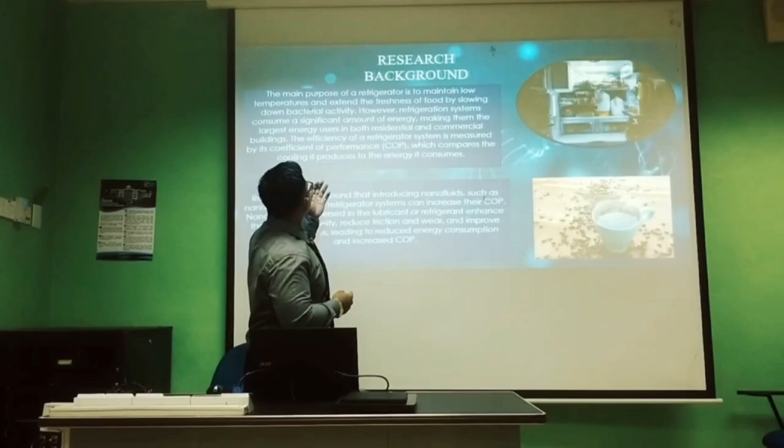For introduction, I will proceed to the research background. Okay. For the research background, you know, the refrigerator is the biggest space where we keep our food. The main purpose of a refrigerator is to maintain low temperature and extend the freshness of food by slowing down bacterial activity. However, the refrigerator system consumes a large amount of energy in residential and commercial buildings.

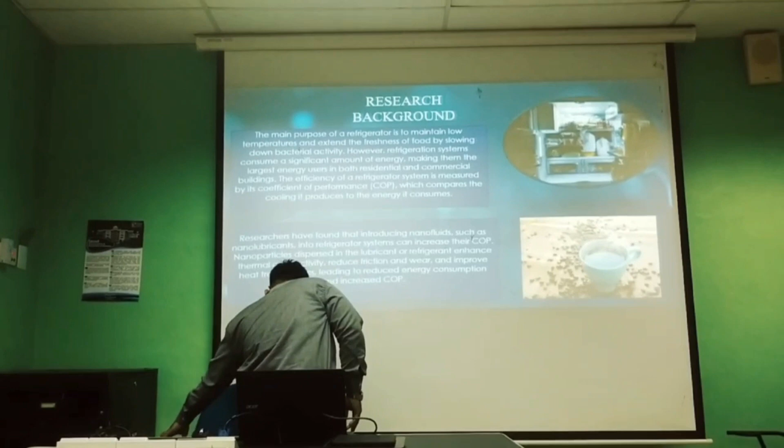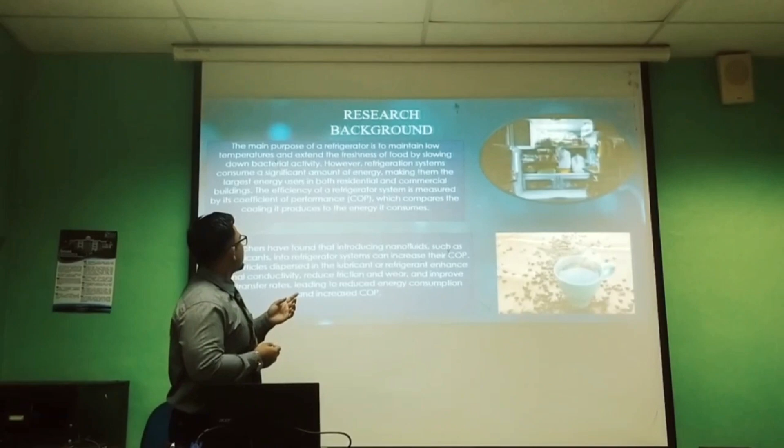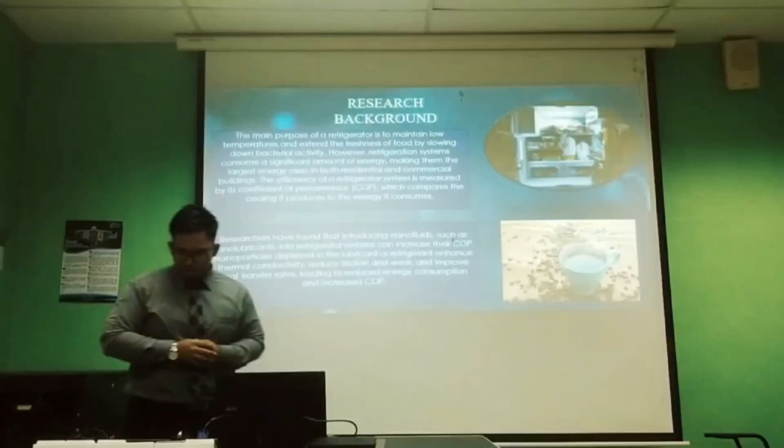To measure the refrigeration system, the efficiency of the system is measured by the coefficient of performance (COP), which compares the cooling it produces to the energy provided for the cooling effect. Okay. So in terms of increasing the coefficient of performance, some research has found that introducing nanofluid such as Nanolubricant will improve the cooling effect with a small amount of energy.

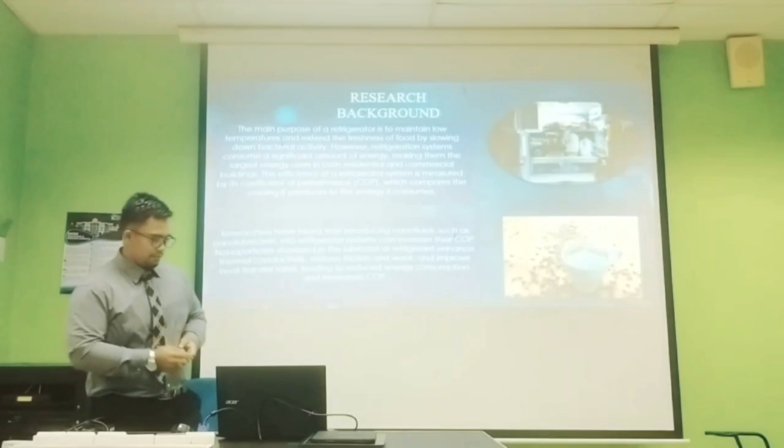One problem statement that we can get from the refrigeration system is, first, low heat transfer. As you know, inside the compressor there is already a type of POE oil or PAG oil. This type of oil has a low thermal conductivity. With low thermal conductivity, the heat transfer becomes slower. For example, conductivity is how the heat can flow. The higher the heat transfer, the higher the flow of heat that can be used.

Second, increased energy cost. By using a large amount of refrigerators, such as in commercial buildings, the energy that they use is very large. Third, the environmental impact. As you know, the energy that we use is produced from our environment. The larger the energy we use, the more it will impact the environment, such as greenhouse gas emission and environmental damage.

Okay. From this problem statement, we came up with the objectives to solve this problem. The objective is to evaluate the effect of mass fraction of aluminum oxide and silicon carbide Nanolubricant on the thermal conductivity. To evaluate the effect of nanoparticle volume fraction of silicon carbide and aluminum oxide Nanolubricant on the COP of the refrigerator system. Second, to determine the effect of mass flow rate of silicon carbide and aluminum oxide Nanolubricant on the coefficient of performance of the refrigerator.

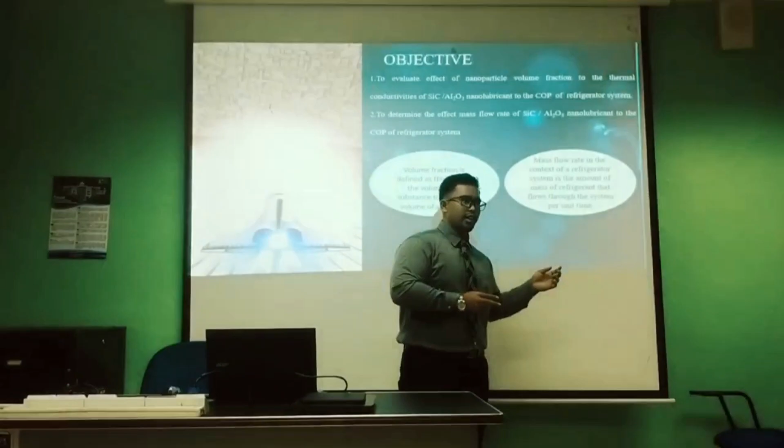Scope of study. In making our project, we have a scope of study. First, in silicon carbide and aluminum oxide nanolubricant, factors such as nanoparticle size, composition, and preparation method play a crucial role. For the preparation method, we have two different types: one-step method and two-step method. For our research, we used the two-step method.

Why do I use this method? Because it provides better dispersion control, breaking down agglomerates, or clumps, and achieves a more uniform dispersion. The second advantage is improved stability by minimizing agglomeration and settling of nanoparticles. For nanoparticle diameter, we use small nanoparticles, 15 nanometer diameter for aluminum oxide and silicon carbide. And for volume fraction, we use 0.01%, 0.05%, and 0.1% by weight in this experiment.

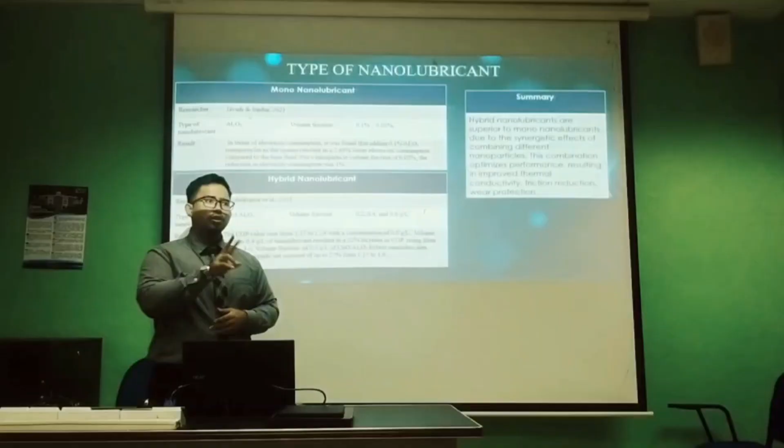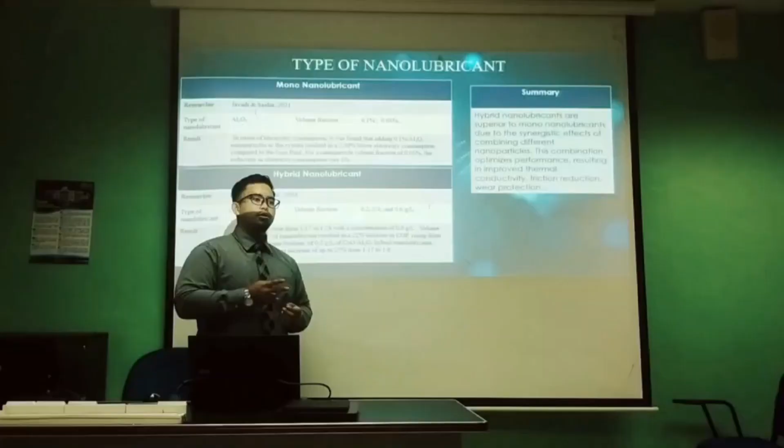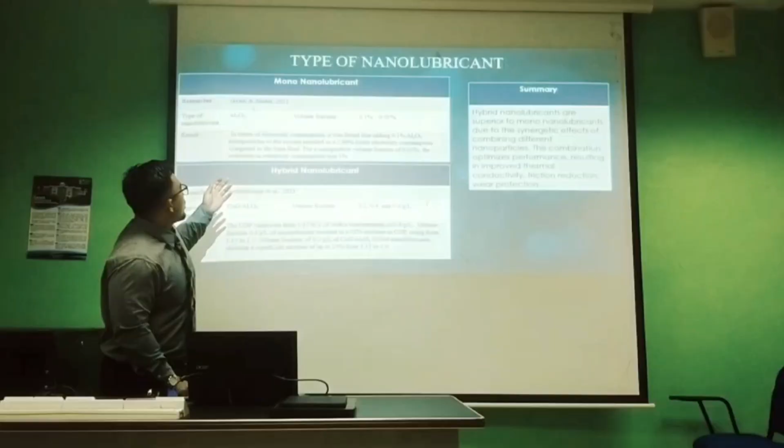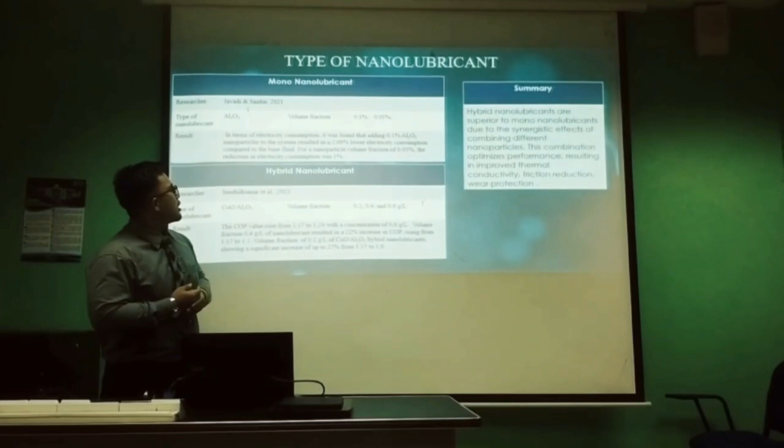In terms of electricity consumption, it was found that adding 0.1% of aluminum oxide to the refrigeration system resulted in 2.69% lower consumption compared to the base fluid. Base fluid means, for example, in the refrigeration system we just use POE in the compressor, without any particles. Okay.

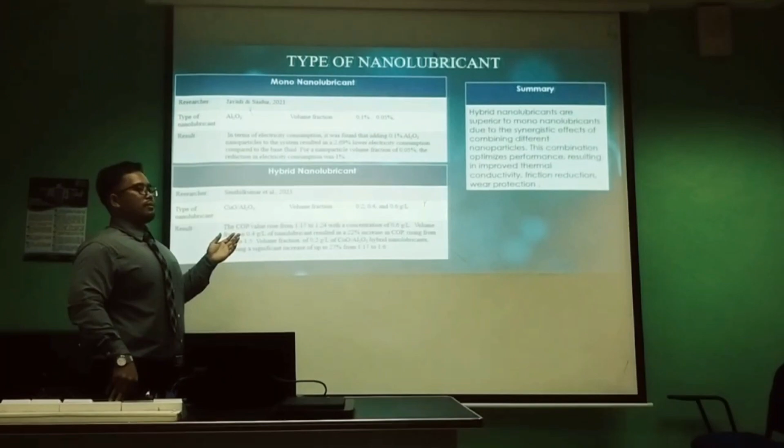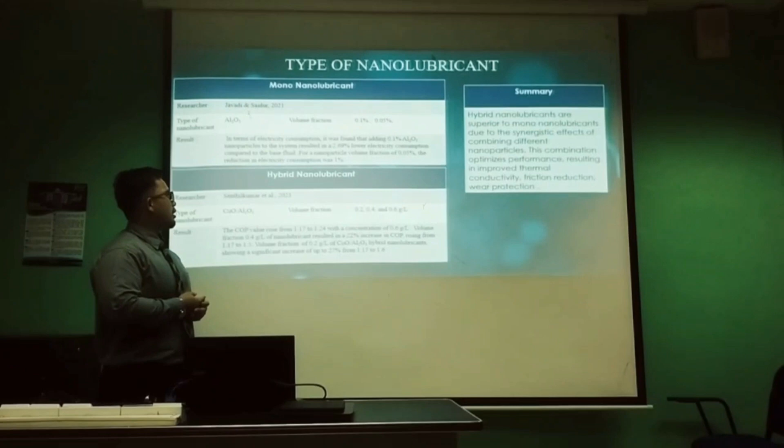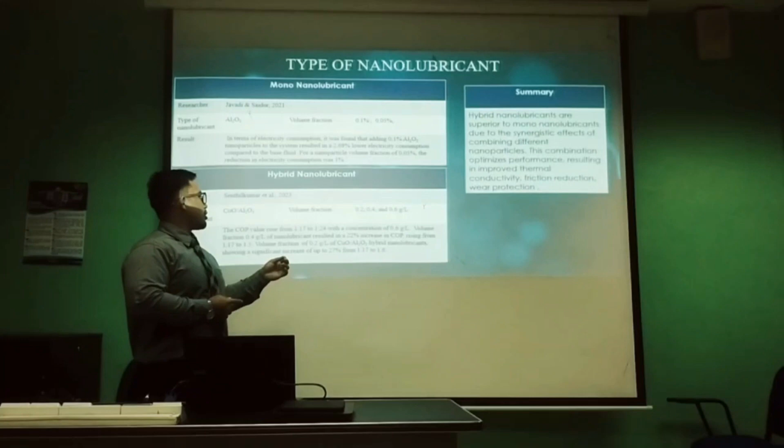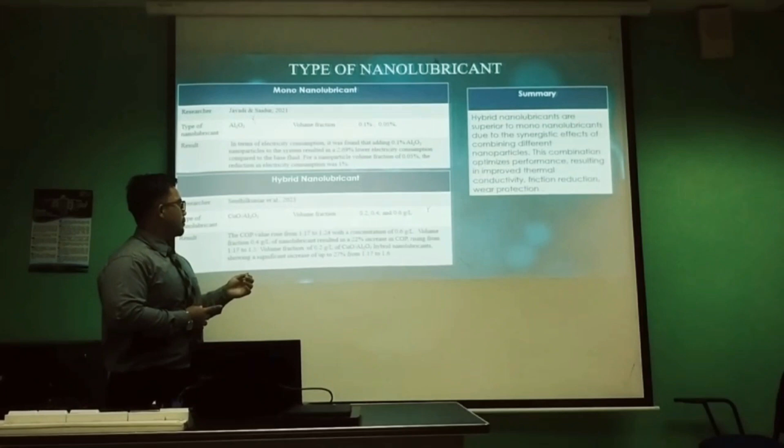Second, hybrid nanolubricant. We use the researchers Senthilkumar et al. 2023. The type of nanolubricant they used is copper oxide and aluminum oxide, with volume fraction in units of gram per liter. The COP increased by 22%, rising from 1.17 to 1.5 with a concentration of 0.4. With a concentration of 0.2, meanwhile, there is a significant increase of up to 27%.

So, in summary, hybrid nanolubricants are superior to mono nanolubricants due to the synergistic effect of combining different nanoparticles. By combining them, the thermal quality increases, friction is reduced, and thermal conductivity will also increase.

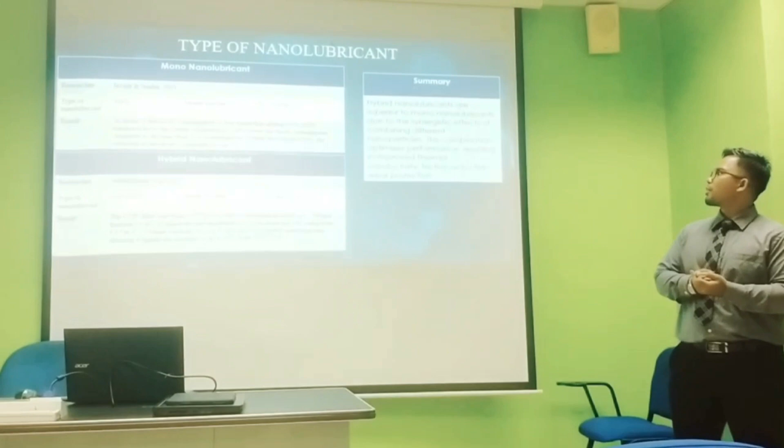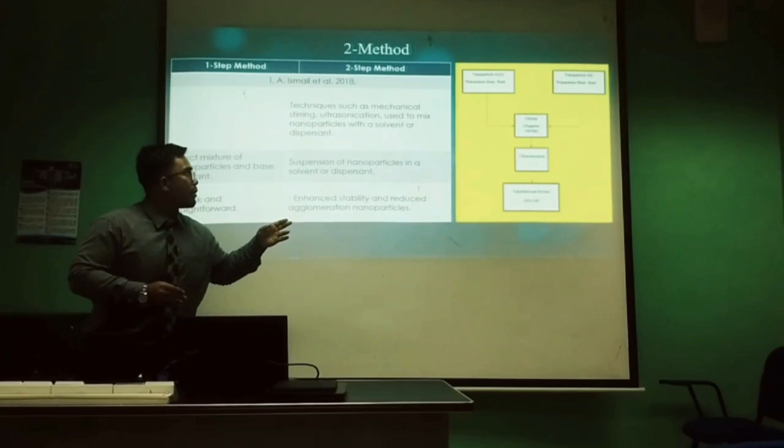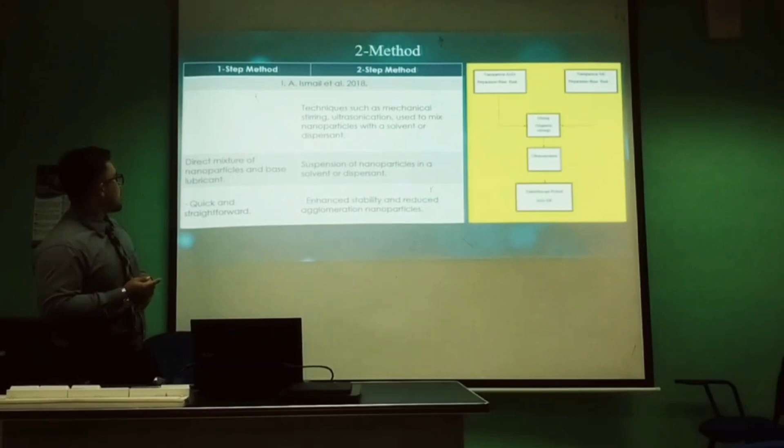Meanwhile, the one-step method doesn't need ultrasonication and mechanical stirring. The one-step method is only a direct mixture of nanoparticle and base lubricant combined. That's all for the one-step method. Meanwhile, for the two-step method, after combining the nanoparticle and base lubricant, it will go through mixing, magnetic stirring, ultrasonication, and then we get the hybrid nanolubricant.

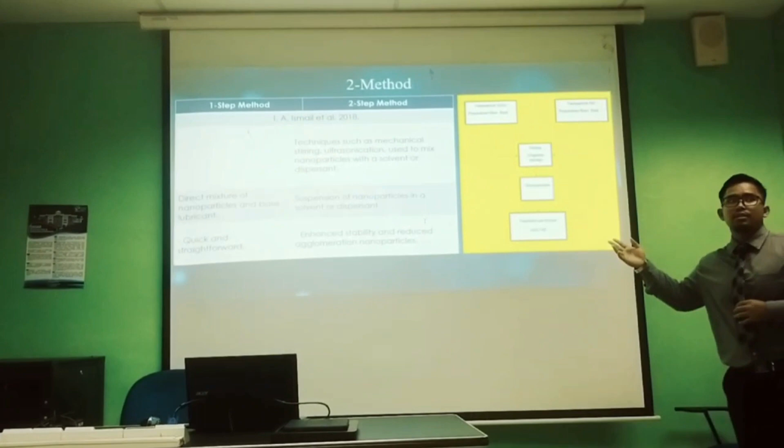For the one-step method, the advantage is it is quick and straightforward, but the two-step method enhances stability and reduces agglomeration of nanoparticles. This flow chart represents the two-step method. First, the nanoparticles, aluminum oxide and silicon carbide, will combine with the fluid. After they combine, they will undergo mixing or sonication. For sonication, we use the Branson sonicator.

Okay, mass flow rate. As you know from the objective, I have stated the effect of mass flow rate. From the research by Ismail et al. 2021, the rise in pressure drop can be attributed to increased interaction and collision between molecules near the wall as the volume fraction of nanoparticle increases. As I mentioned, the higher volume fraction also impacts the refrigerator cycle. Yes, the viscosity will be increased.

So when the viscosity increases, the mass flow rate has to be higher. With a higher mass flow rate, the compressor needs to work hard to flow the higher viscosity nanoparticle to the other parts. A higher mass flow rate in the refrigerator system improves capacity and hence gives more efficient and faster temperature reduction. The advantage of a low mass flow rate in a refrigerator system is reduced energy consumption and improved stability and reliability.

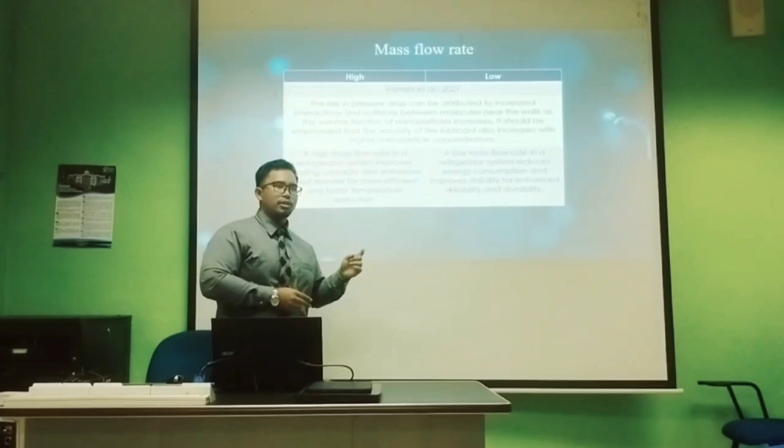For our experiment, actually, a higher volume fraction is not good for the FYP, because the higher the volume fraction, this will affect other variables such as pressure. I will explain more in my methodology.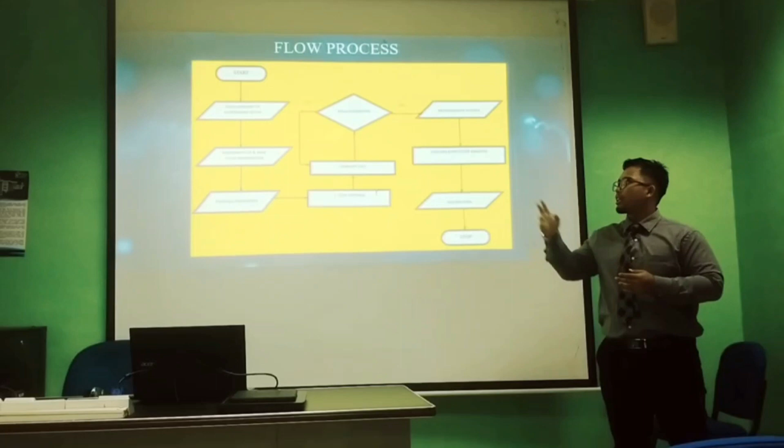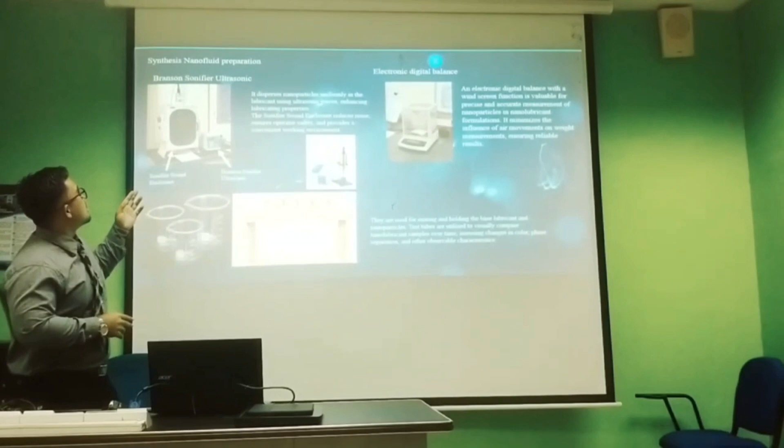Okay, synthesis of nanofluid refrigerant. As I mentioned before, this is the ultrasonication that we use, the Branson Sonifier Ultrasonic. The use of this Branson sonicator is to disperse uniformly in the lubricant using ultrasonic waves. When it goes into the lubricant, it will undergo vibration.

But for this one in our lab, it also has a Sonifier sound enclosure. By providing the sonicator enclosure, it reduces noise, ensures operator safety and provides a comfortable working environment. Because this process is noisy, with a sonicator enclosure the noise will be less.

The electronic digital balance is to calculate the mass of nanoparticle. The electronic digital balance with a windscreen function is for precise, accurate measurement of nanoparticle in nanolubricant formulations. Without the screen function, the electronic digital balance is so sensitive to the air, it will affect the mass of nanoparticle that we want to measure. It minimizes the influence of air movement on weight measurement, ensuring reliable results.

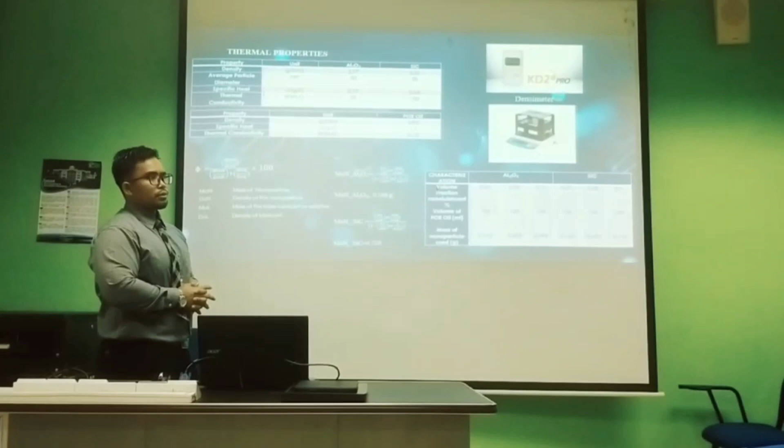This test tube is an example of equipment we use for our nanolubricant, and this test tube we use for thermal properties. Before we proceed to our two-step method, we have to know the thermal properties of this nanoparticle. This is the density. The higher level is for the aluminum oxide and also silicon carbide. The lower is for the base POE oil.

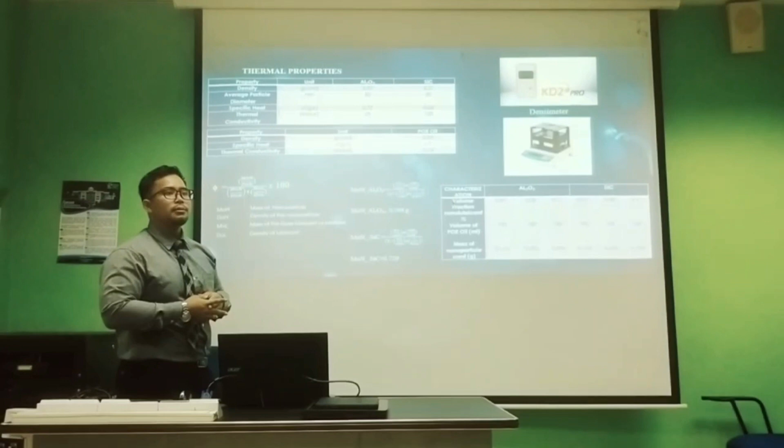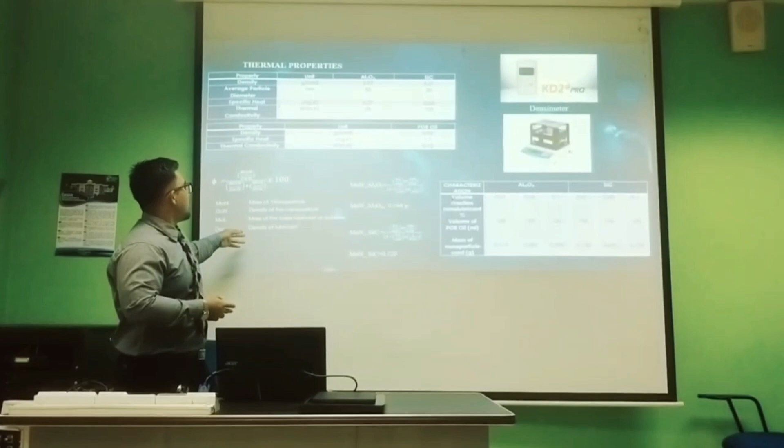For the base and nanolubricant, we use the densimeter. For specific heat and thermal conductivity, we use the KD2 Pro. It's also in the manual. After we get the thermal properties, we can proceed to finding the mass of nanoparticle, because we only indicated the volume fraction that we use, but we didn't indicate the mass of nanoparticle. So we use this concentration formula. After we use the formula, we get the mass of each nanoparticle.

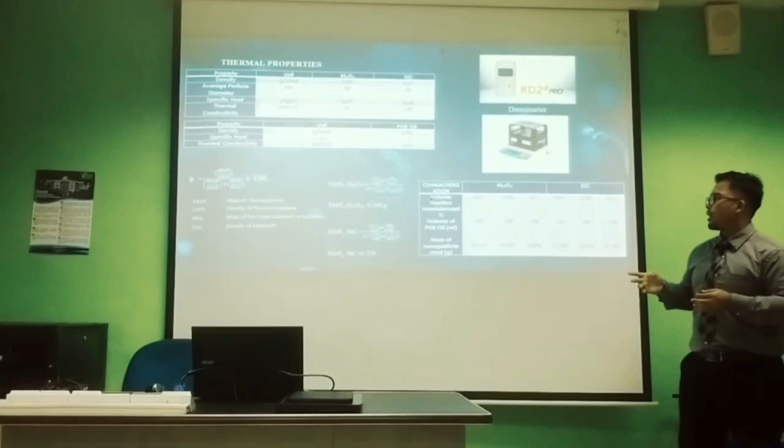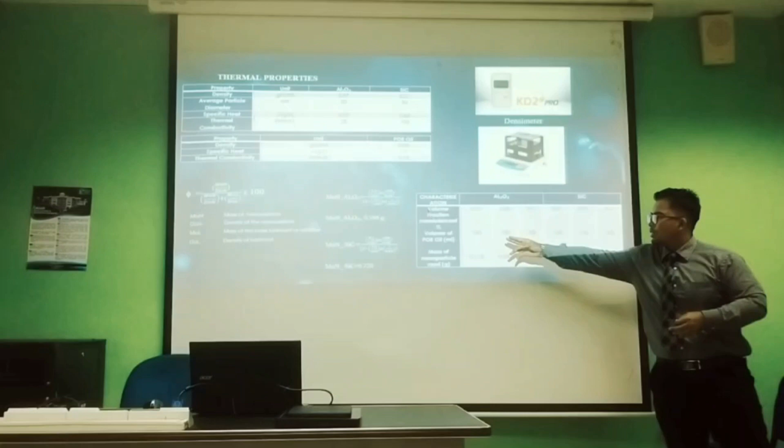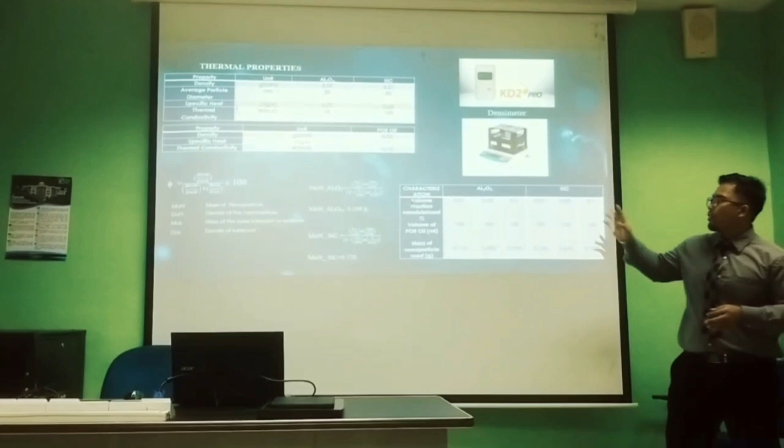For example, a concentration of 0.1 aluminum oxide and silicon carbide with the volume of POE oil. It will be mixed in one base lubricant of 100 ml, and this is the mass of nanoparticle that we get from the formula. As you can see, the volume of POE oil is 100. With this volume of POE oil, we use a composition ratio of 50-50, aluminum oxide 50, silicon carbide 50, to make 200 volume of POE oil and nanolubricant. After the two-step method, we go to the stability test.

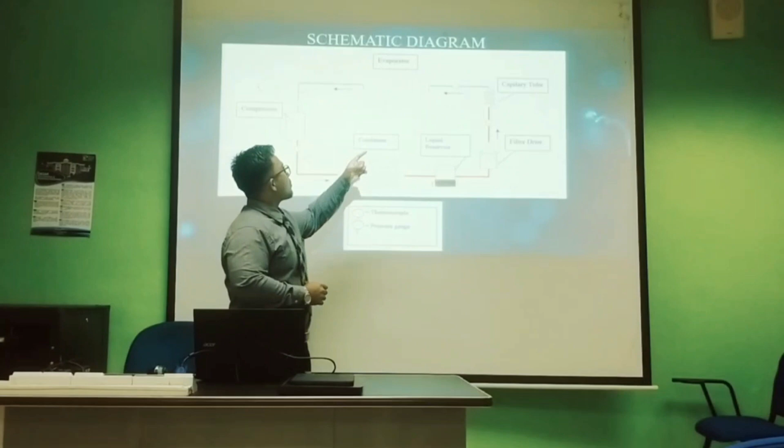It will undergo the evaporator. From the evaporator, the heat from the refrigerator is carried away to the compressor until the condenser. The condenser is the place where heat will be released. In the compressor it is a gas, but in the condenser gas turns to liquid, undergoing a phase change, and after the evaporator, it undergoes the phase change from liquid to gas.

That's all from me. Thank you.

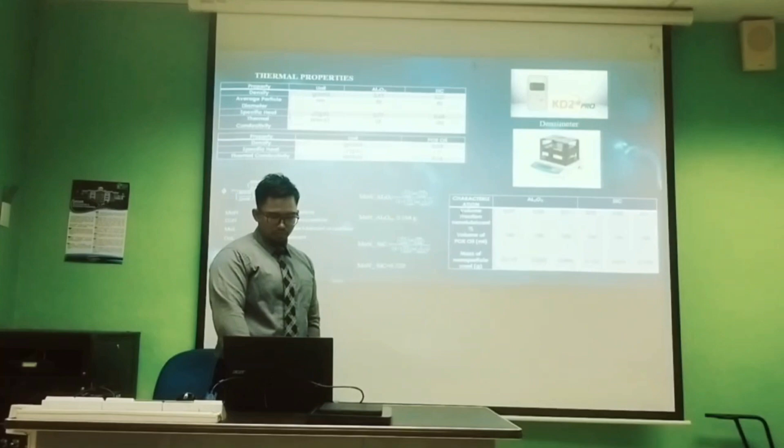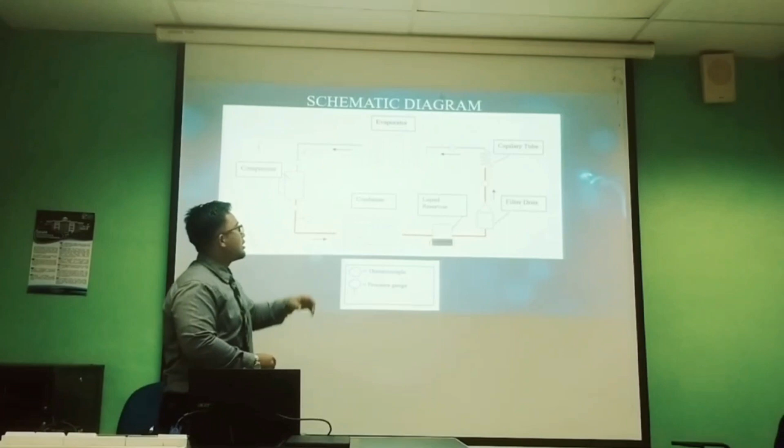Actually, we will select this as a formula: T low temperature divided by T high minus T low. So, actually, we have to undergo the experiment first to check whether the COP performance is correct or not. But we just checked from the researchers. Pressure, to check the mass flow rate there.

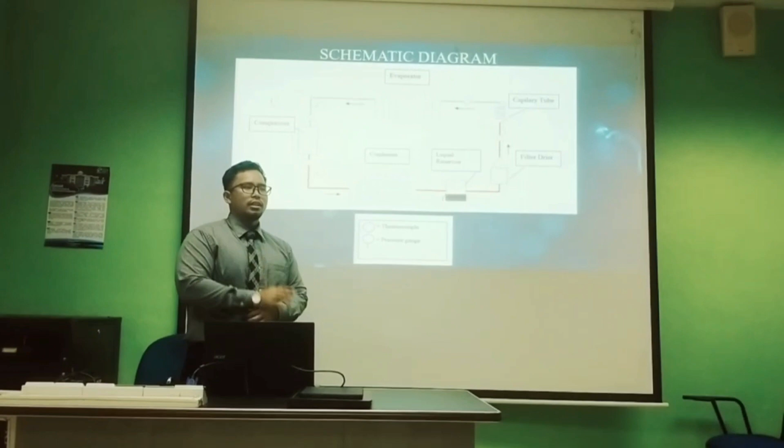No. Actually, let me see. Okay. Actually, the increase of it is better, but volume fraction, increasing the volume fraction will make the COP decrease. At some point, it will turn. But what is the effect of it dropping? It is affected by the mass flow rate.

Mass flow rate: as the volume fraction of fluid increases, the viscosity of the nanolubricant will also increase. This will increase the resistance to the flow of the refrigerant, which will reduce the mass flow rate of the refrigerant, and consequently the cooling capacity of the system becomes lower. We reduce the mass flow rate. When we want to reduce the mass flow rate, we have to maximize the compressor to boost the mass flow rate higher. It will also take more energy consumption.